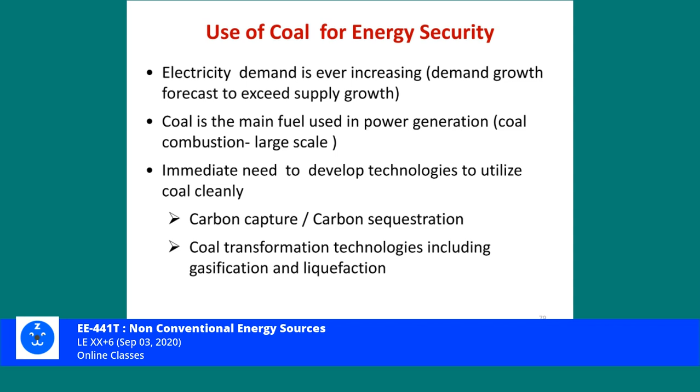There is an immediate need to develop technology to utilize coal, and this process includes carbon capture, carbon sequestration, transformation technologies, gasification, and liquefaction. All these things can be simultaneously achieved while moving from direct combustion. All of you are aware about these terms like carbon capture, carbon sequestration and so on, we have discussed it previously.

So now coal represents the cheapest and most convenient fuel to meet expected surge in electricity demand. It is readily available, and as I might have told you, or you even know, India has a huge amount of coal reserve. But the quality of Indian coal is not that much.

A kind of proven coal reserve equivalent to 111.5 times its annual consumption, this was a study carried out, or almost 110 times the annual consumption at the present rate at that time. This means it has about 110 or so years of coal left at current consumption levels, and that almost excludes the discovery of new reserves. So the estimation has been that the coal reserves at the present consumption rate can give us almost 110 years of time, and we can utilize that coal reserve.

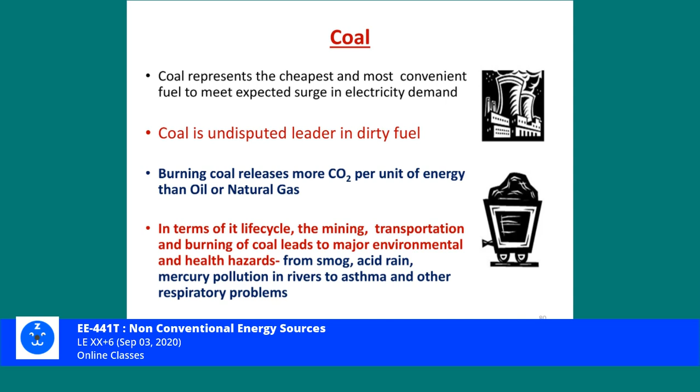So all kinds of pollution-related things are present when we are going to use coal for our power generation. Now this is the data regarding coal production, and if you can observe it closely, the Organisation for Economic Co-operation and Development, OECD, they have got constant coal production. They have not increased their dependence for energy requirement on the coal reserves. So they have not decreased the exploitation or use of coal for their energy requirement, but they have not increased it either.

Whereas the Asian countries, especially China, and Southeast Asia, India and all, they have increased their coal production during these periods. And that is simply to increase their growth rate, or you can say they also want to achieve lot many things as far as their industrialization requires more and more power.

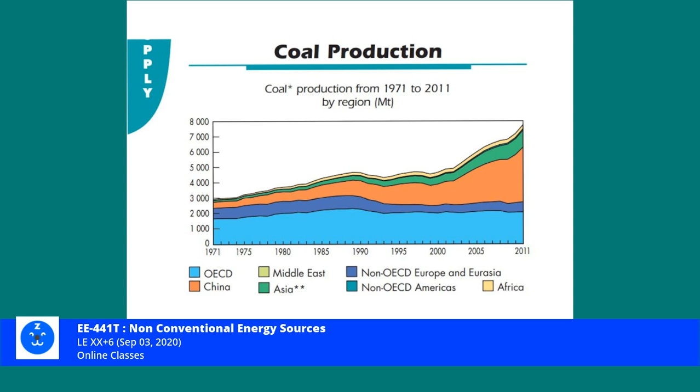Now the coal production, the same kind of thing, it has increased from the 1973 level to the 2011 level. And as you know, the greenhouse gases, if occurring in China or India or other African countries, it is going to affect the overall situation for the whole world. So the production of coal from 3041 million tons has increased, or has doubled, by 2011, and likewise we are witnessing the poor situation in our environmental conditions.

Coal production consumption in India: earlier it was 538 metric ton, the consumption was 628, and almost 90 metric ton was the deficit, and it was met by import. As some of you know, the quality of Australian coal is wonderful, one of the best kinds of coal available in the global market. So coal is imported in order to meet our requirements.

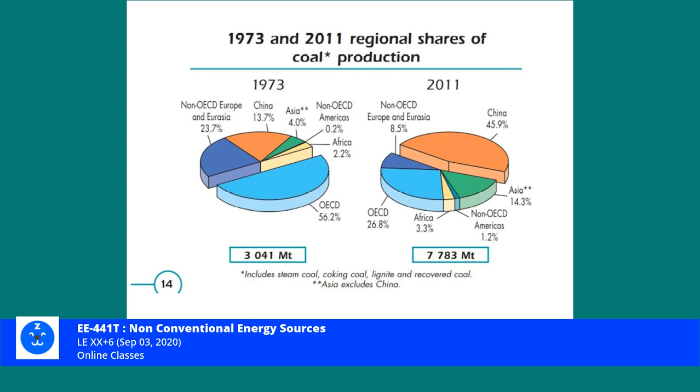Now, what is happening when we remove the carbon dioxide? It is related to IGCC, the integrated gasification combined cycle. So when we use some of these clean coal technologies, it gives us a better situation, definitely when the CO2 content is reduced.

From this slide, you can see that after gasification and all the cleaning up processes that we can do, this is a very different kind of discussion when all these things are discussed in detail, but we will confine our attention to a somewhat superficial level. We are not going deep into this. We just want to know the fundamentals of the clean coal technologies or other techniques that can be combined while our power generation situation is improved.

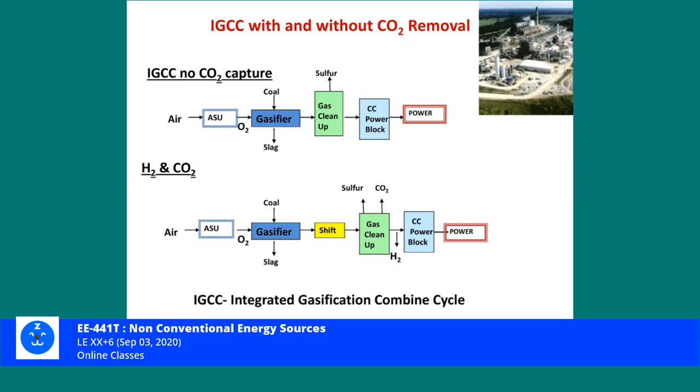Now, CO2 capture in coal power systems: when we capture it and go for sequestration techniques, we deeply bury this CO2, and that is time consuming as well as it requires a lot of funds to attain that kind of expertise.

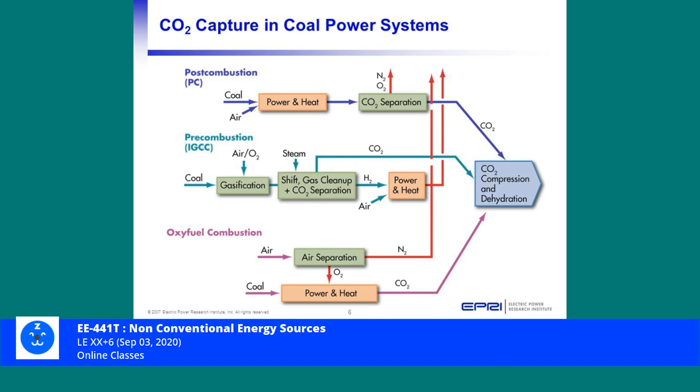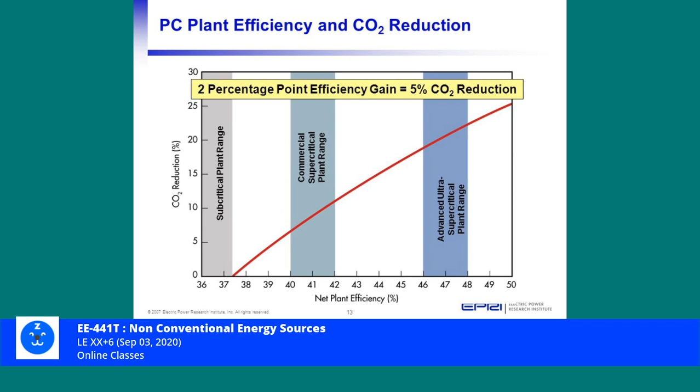Now this is going to be the improvement in efficiency with respect to when the CO2 is reduced. A 2 percentage point efficiency increase is shown while we adopt this kind of technique.

What are the advantages that are achieved? Sulfur is removed from syngas using commercial gas processing technology, reducing the sulfur content from the atmosphere. NOx emissions are controlled by firing temperature modulation in the gas turbine. All these are the things that we obtain while we go for the integrated gasification combined cycle.

There are other advantages. Mercury: more than 90% removed from the syngas by adsorption on an activated carbon bed. Water use is lower compared to conventional coal plants. Byproduct slag is vitreous and inert and often saleable. CO2 under pressure takes less energy to remove than from flue gas at atmospheric pressure. So these are the related advantages.

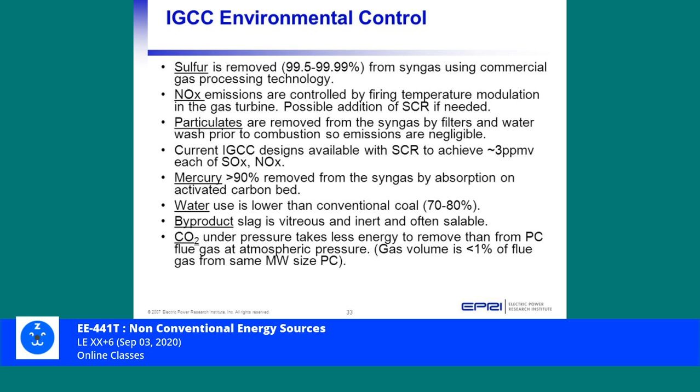Now we can sum up. Energy contribution from non-renewable fossil fuels shall continue at least for the next two decades. They had predicted around 2012-13 that it will last for 20 years, but it may go beyond that, especially in underdeveloped or developing countries, because the installation of renewable technologies is sometimes not very cost effective for these countries.

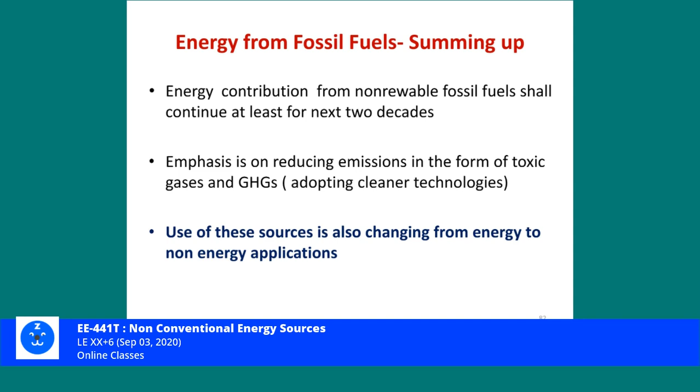They need more and more funds in order to go for renewables, and that's why even at the governmental level or at private participation, they are not much inclined to go for renewables. Emphasis is on reducing emissions in the form of toxic gases and greenhouse gases. Use of these resources is also changing from energy to non-energy applications. So these are the current situations estimated for the near future.

With all this, now we can go for non-fossil fuel energy sources. By this time, all of us must agree that electricity generation from fossil fuels is not going to be environment friendly, because if we keep using fossil fuel at this rate or consumption level, there are three things which are going to happen simultaneously. One, these reserves are not going to last for many years, and we will be devoid of all such options. Even in essential things, we will not be able to use them or have no alternative.

At the same time, these fossil fuel sources are not going to provide us the huge requirement of our energy needs. They simply fail in their generation capacity if we are dependent on these kinds of sources.

At the third point, we can all agree, I don't think anyone has any problem, that environmental conditions, global warming, climate change, and the rising sea level are all problems known to be associated with higher and higher content of carbon dioxide in the atmosphere. So unless we reduce our carbon footprints, the situation is very alarming in the near future.

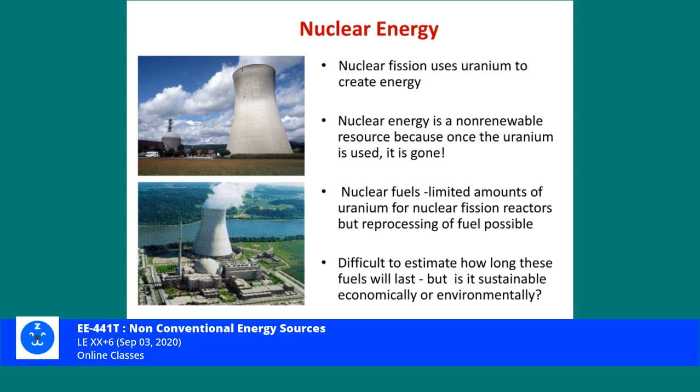With nuclear power, huge amounts of power can be produced from a small amount of uranium, no doubt, but it produces radioactive waste, and that is dangerous to health and life for hundreds of years.

We have already seen the explosion of nuclear bombs that were done in the Second World War. There is no secure place for storage.

Public confidence has been shattered by the explosion at Chernobyl in 1986 and the disaster at Fukushima, Japan, March 2011. These are the two major nuclear disasters that have occurred. 86 Chernobyl at USSR, and thereafter in 2011 it happened in Japan.

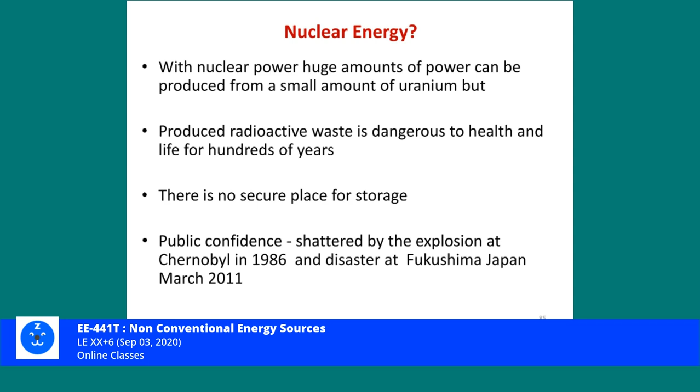In the 86 disaster at Chernobyl, many people were trapped. So the hazards are related to fire, earthquake at the plant, cost and lead time for construction of nuclear power plant also is a disadvantage. Shortage of skilled labor, disposal of radioactive nuclear waste.

This causes great concern. Earlier it was done at sea, deep inside the sea, but it affected marine life for such kind of disposal. So the disposal of radioactive used nuclear waste is going to give us many problems.

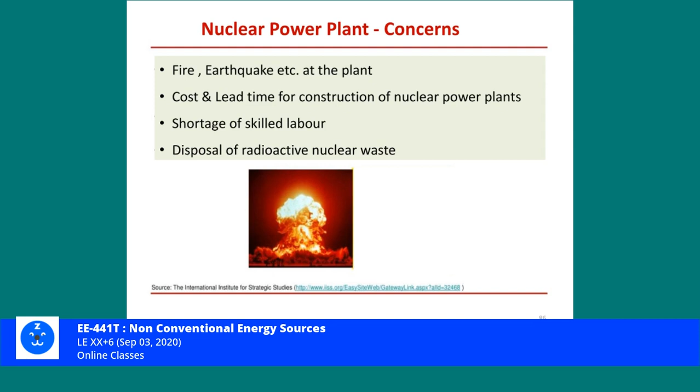So in India and elsewhere also, the dependence on nuclear fuel has not been very encouraging as it was thought to be in earlier stages. So rather we have shifted attention from nuclear to other renewables.

Now renewable energy sources are natural sources that can be replenished in a short period of time. Hence, they can last as long as we are surviving on Earth, like sun, wind, and all.

And what are these sources? If it is solar, geothermal, wind, biomass, hydro, MHD also.

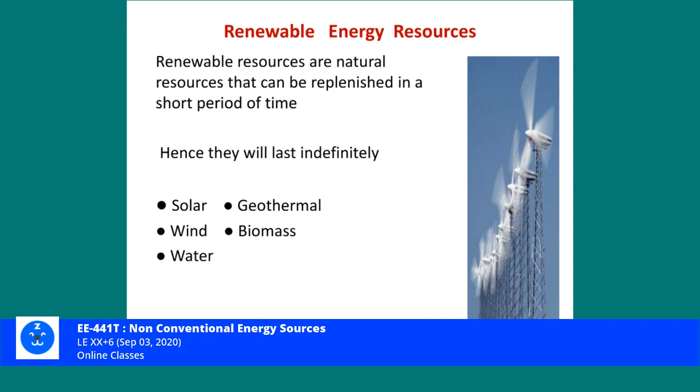We will discuss all these renewables. Renewable energy sources are being replaced, generated at the same rate, as they will last indefinitely.

Wind, solar, geothermal, etc. can play a supplementary useful role, but will not replace fossil fuels in the next two decades. That's very true.

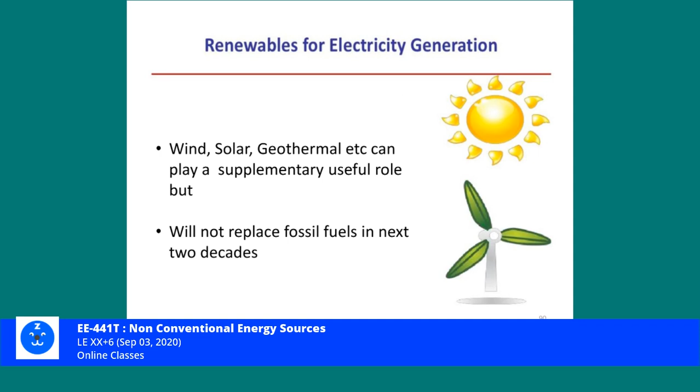In case of biomass, the cycle of sunlight, photosynthesis, plant growth, absorption of CO2, emission of O2, all these are the processes. Combustion of wood to heat. Some plants can give us alcohol also.

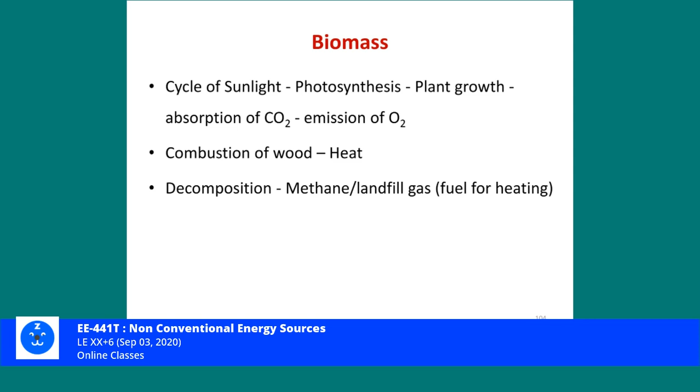Decomposition, by this process we get methane or landfill gas, fuel for heating, all these things can happen. These are the associated advantages related to biomass apart from electricity generation.

It can deliver energy in all forms, solid, gas and liquid, for application as heat, electricity, transportation. Gasifier produces fuel at much lower cost. Energy security, poverty reduction, positive environment effects, carbon dioxide neutral, restoration of degraded land, water retention, etc.

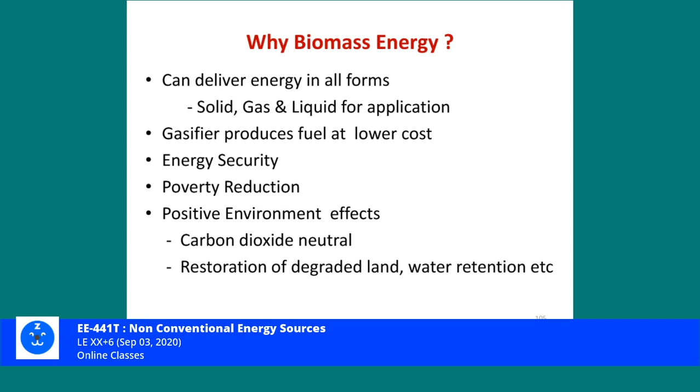So all these things can be achieved. This is a separate topic of discussion in later units. And what are the sources?

Clean wood chips, urban wood residues, dry residues contaminated with other materials, animal residues, organic component of municipal solid waste. In Bareilly also, there was a solid waste plant installed, which functioned for a few days, not for a few months, and somehow it could not be restarted.

And this gives a very good option for city problems. All the garbage, municipal garbage in liquid or solid form, can be utilized in case of a power generating system.

It not only gives clean space in terms of landfills that are used for garbage storage.

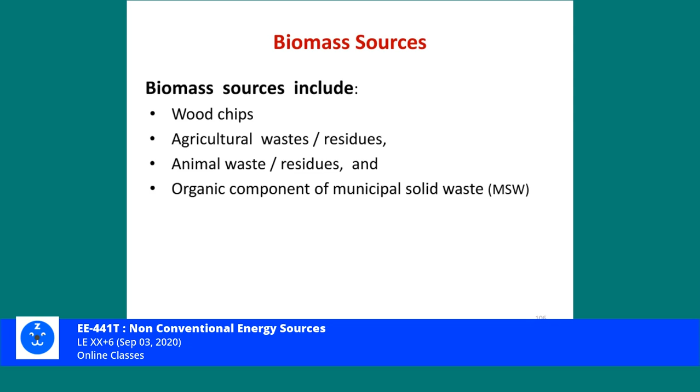Only the transportation cost is entailed for this kind of reconversion. We need to pay for the transportation cost because it has to be collected at the central plant, and this collection has to be very efficient in order to run our biomass conversion.

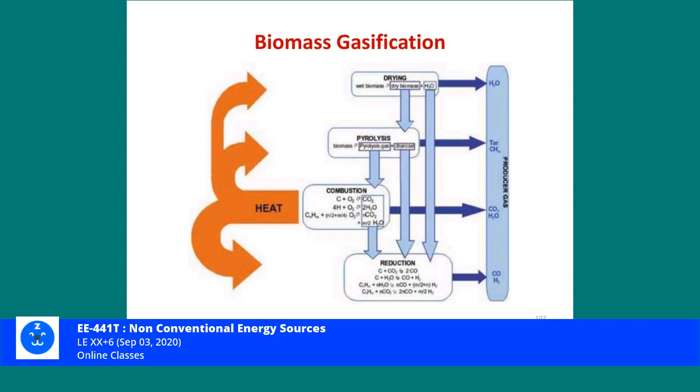Now the kind of gasification, different types of gasification processes, include drying, pyrolysis, combustion and reduction. Thereafter we go for obtaining the kind of energy out of this process. Environmental advantages: renewable source, reduces landfills, protects clean water supplies, reduces acid rain and smog, reduces greenhouse gases.

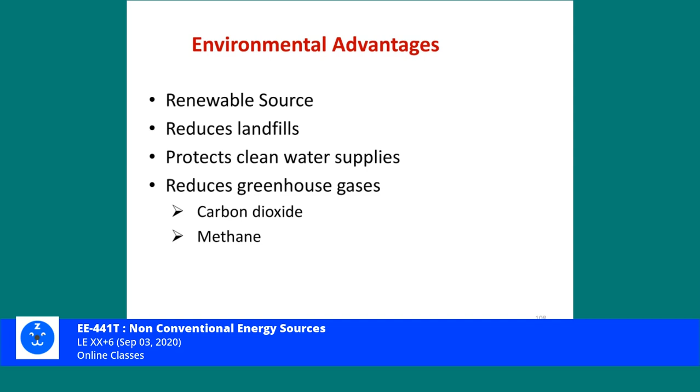Solar power. Solar energy applies energy from the sun in the form of solar radiation for heat or to generate electricity. Solar powered electricity generation uses either photovoltaic or heat engines. It can have two types of energy conversion process: solar thermal or photovoltaic.

In case of photovoltaics, solar cells convert light into a small electrical output. We need a bank array of cells for useful output. Cost of cells is high but reducing, that is the main feature. Efficiency of the cells is improving, and we are in the process of increasing our solar capacity.

Solar panels can be installed on rooftops. They can absorb heat in the form of radiation from the sun. Systems like domestic central heating and radiators can be arranged with this, providing topping up of domestic hot water. We can use solar thermal for this.

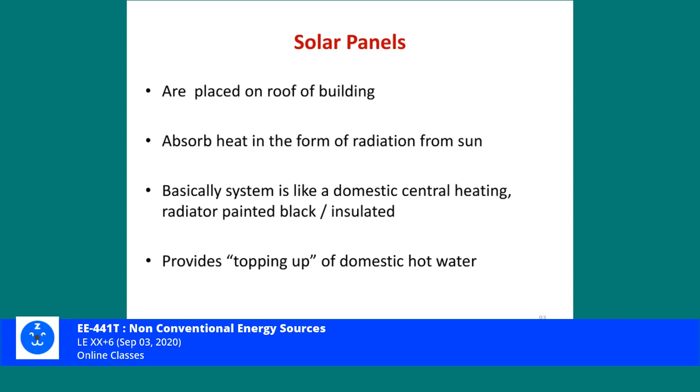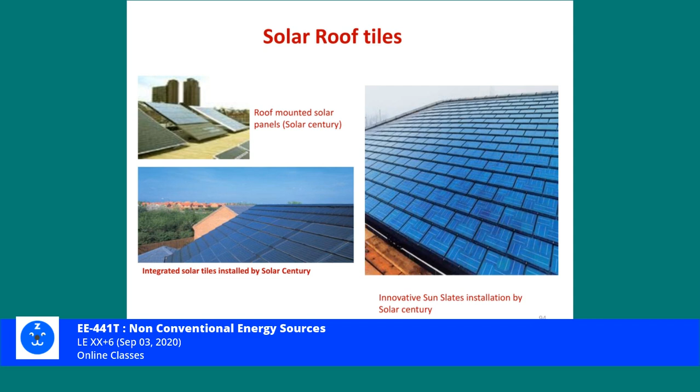These are different pictures related to solar roof tiles, which can be fixed on the roof. We have different panels, roof mounted.

Solar power generation can be located or established in areas where the radiation or sun intensity is high. At the same time, they are not much used for agriculture activity, so desert areas are ideal for the establishment of solar power generation.

Parabolic mirrors reflect and focus the sun's rays into metal water pipes located along the focal axis of the mirrors. High temperature produces steam, and electrical power can be generated. The largest capacity solar power plant in India, or anywhere, is 2,250 megawatts, in Bhadla village at Jodhpur.

India stands very high in terms of solar power. I think it is at number 2 or 3, I don't exactly have the figure right now. In terms of solar power production across its plants, it currently accounts for about 40% or more of its total capacity to renewables, including hydro.

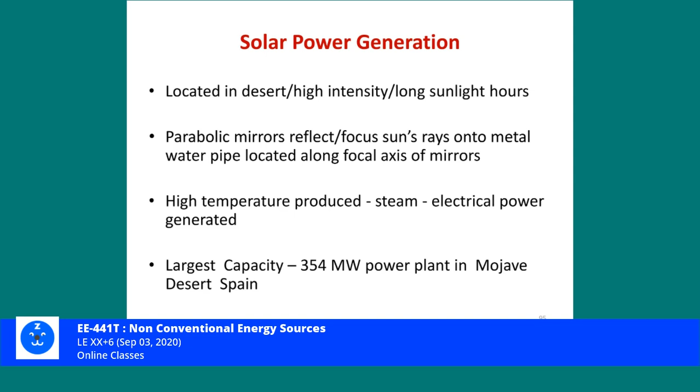So the overall situation of our country in solar installation is very encouraging, and India has got very huge capacity as far as solar generation is concerned.

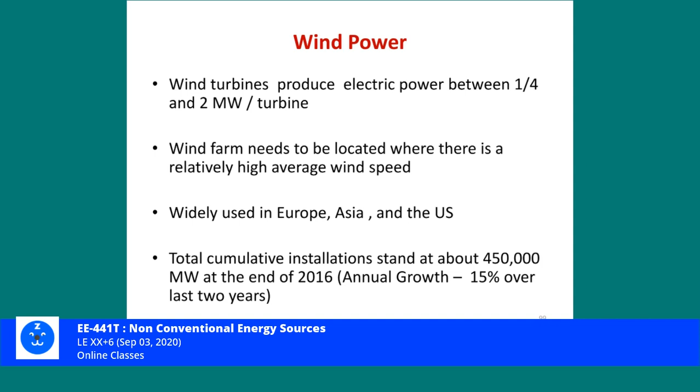Now, what are the best locations for wind turbines? Offshore locations are good, as we can have very good wind speeds in those regions, larger average wind speed than onshore, easier planning consent, technical expertise exists from oil rig experience, suitable location. It is not going to create any kind of right-of-way problems related to the huge structure of wind turbines.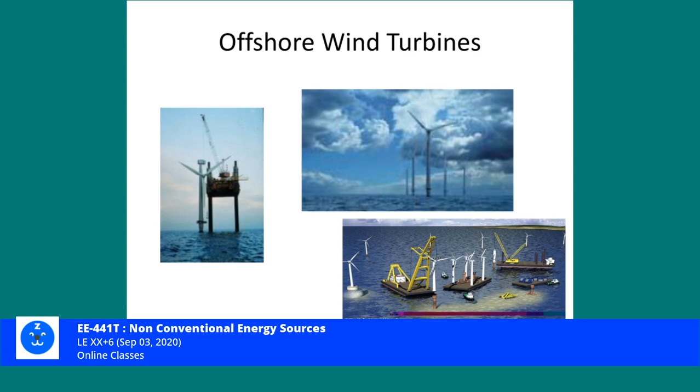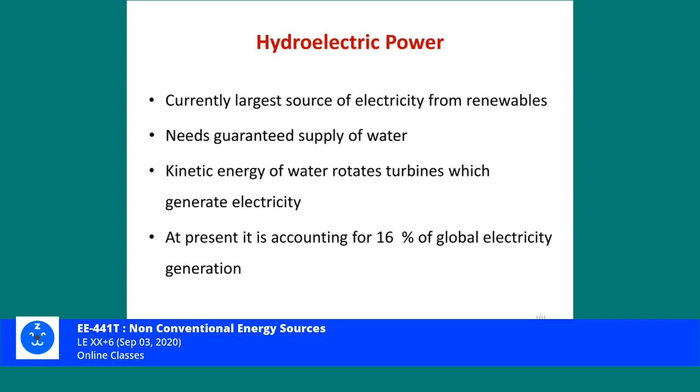Thereafter we have hydroelectric power generation, currently the largest source of electricity from renewables, because they have been in operation for so many years in the past. It needs guaranteed supply of water. Kinetic energy of water rotates turbines, which generates electricity. It is the most widely used form of renewable energy, accounting for 16% of global electricity generation, as per data available in 2010.

Then comes tidal power, located at some coastal sites, usually estuaries and bays with large tidal range. Shape of the coastal site above and below sea level determines the range. At high tide, a reservoir of water is created, which is allowed to ebb through turbines located in the dam. So depending upon the lunar cycle, high tides are created, and that change in the flow of water is utilized to run the turbines.

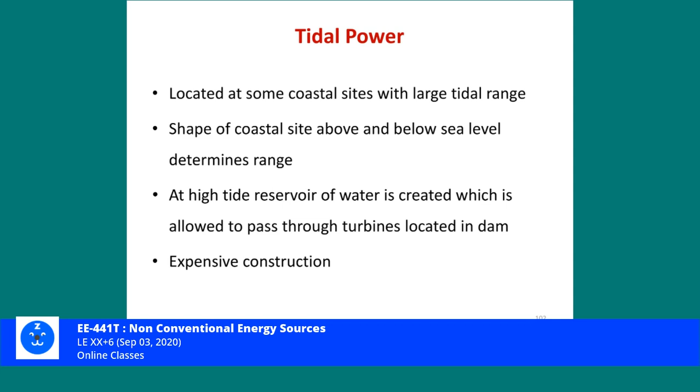The construction is definitely somewhat costly as compared to other power plants, but it is definitely an alternative, and many tidal power plants have been installed worldwide. Then there is wave power, also one of the ways renewable energy can be generated.

Then comes geothermal. Geothermal energy is thermal energy generated and stored in the earth. The heat used for geothermal comes from within the earth, all the way down to Earth's core. The world's largest geothermal power installation is the Geysers in California. They are known as geysers because hot water is coming out of these locations, with a rated capacity of 750 megawatts.

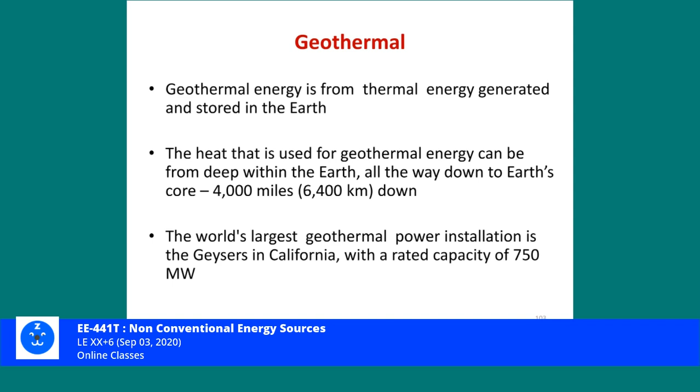As of 2012, we can summarize the discussion related to renewables: it is the energy that comes from resources which are continually replenished, such as sunlight, wind, tides, waves, and geothermal. About 16% of global final energy consumption comes from renewable sources.

That figure is rising, maybe at this time it might be more than 20%, with 10% of all energy from traditional biomass, mainly used for heating, and almost 3.5% from hydropower. New renewables - small hydro, modern biomass, wind, solar, geothermal, and biofuels - accounted for more than 3% and are growing very rapidly.

The share of renewables in electricity generation is around 19-20%, and this figure must be greater, reaching almost 24 or 25%, with 16% of electricity coming from hydro and 3% or more from other renewables.

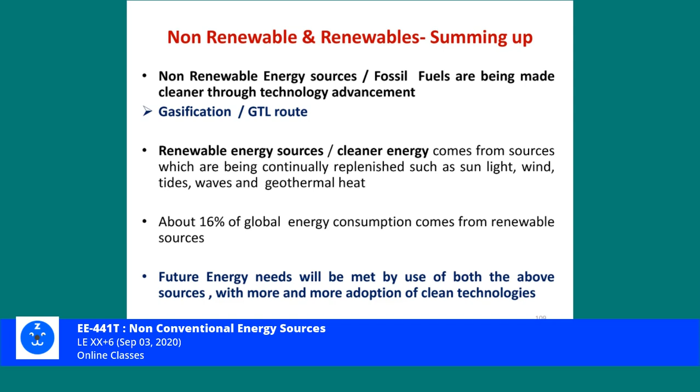Now this discussion gave us a broad overview related to what has to come in coming days. It provides us a brief outline that will be followed by discussion on different types of renewable technologies. So it was a kind of precursor to our non-conventional energy sources that we are supposed to learn, knowing what kinds of developments are happening in our country or elsewhere.

I hope you must have some basic idea about the present state of renewables with respect to global perspective, and things occurring indigenously in our own country, where India stands in terms of solar. The situation in terms of solar energy is very encouraging, but the problem lies elsewhere: it has not been very competitive in price terms related to cost effectiveness of establishing and generating power. The grid parity comes after a certain period of time, and that is definitely slowly coming down in terms of years or time period. In the coming days, the situation is bound to improve.